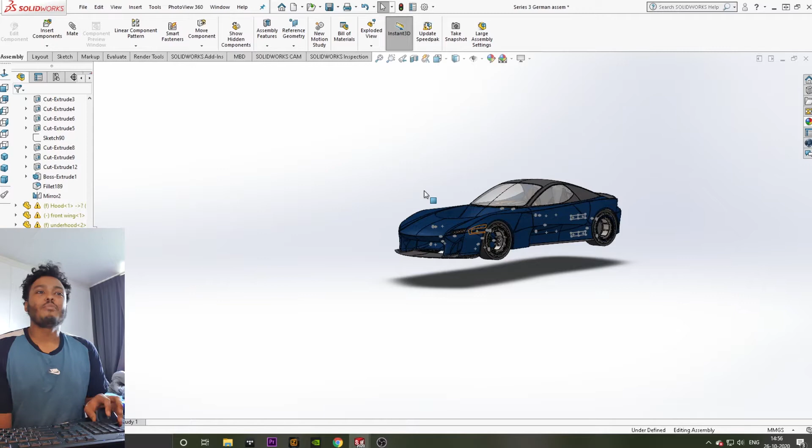I've been working on this car for about the past 3 to 4 months, I would say, and everything is completely done now, so I don't really have to add anything to it.

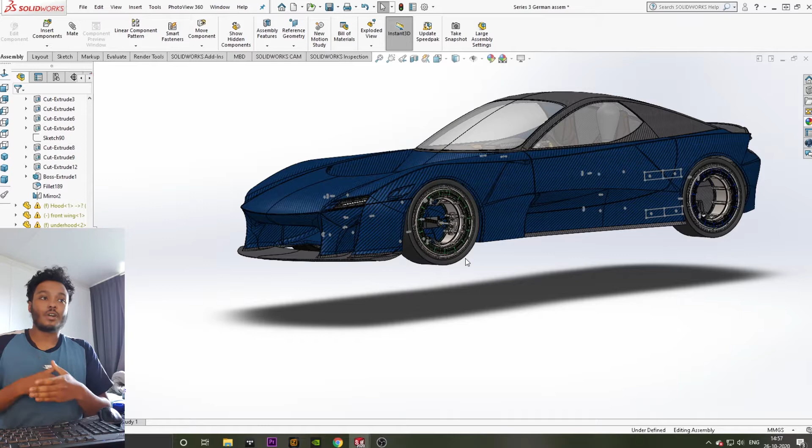So this car will take advantage of hydrogen fuel cell technology that would enable the car to have a very limited tank that you could put hydrogen in, that would allow the car to have a high energy density and a high range and all of that.

With that, you would also be able to have maybe metal 3D printing, which would be capable of using multiple materials within a metal 3D print, and then it would be possible to integrate a full electric motor system that is 3D printed in one go.

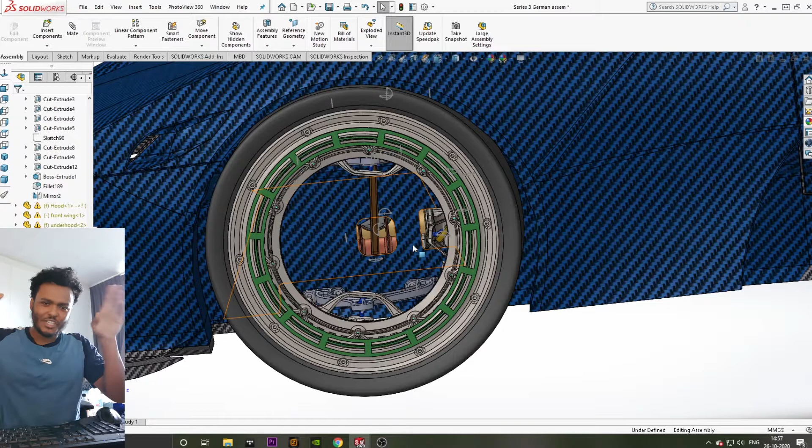I know this is like future gazing and kind of using my imagination a little bit of what would be possible, but I do think that is kind of what the future of powertrains, or even what the capabilities in the future are.

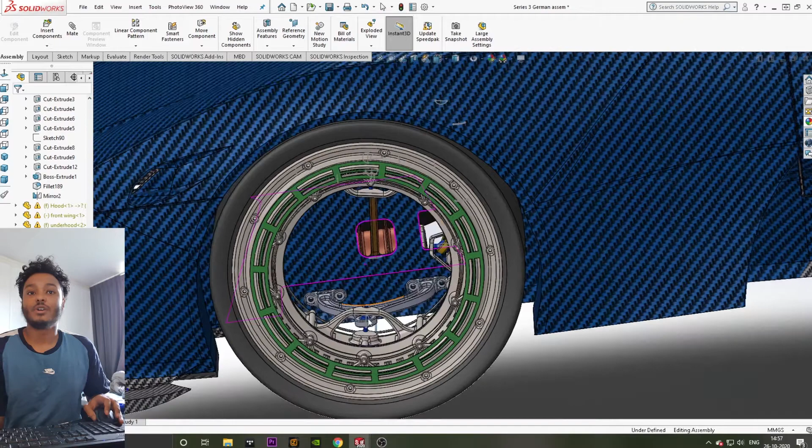So that would make it possible to make a hubless powertrain that would actually be in the wheel assembly. This would be the electric motor itself. You would have the suspension upright, and all of the suspension components would then also be mounted to the wheel, and even the steering rod here.

So you could see, even if you go underneath it, that there is quite a sophisticated suspension setup going on here. If you take a couple of the body panels off, here you have the torsion bar.

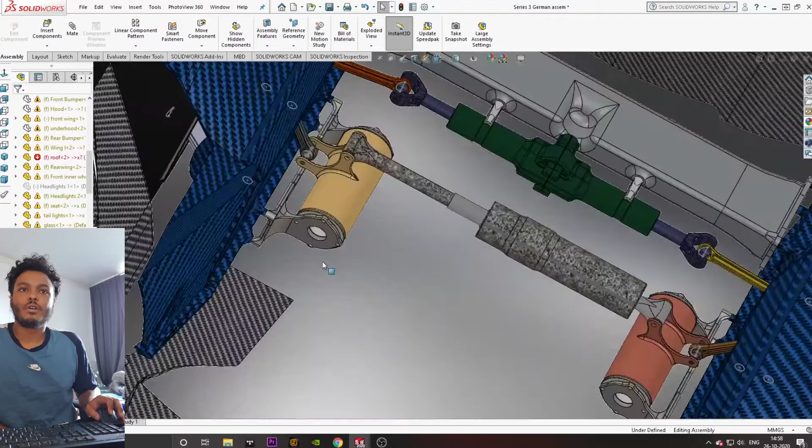The torsion spring suspension setup with a pull bar that is attached to the top wishbone, and then you also have almost like a Koenigsegg triplex anti-roll bar hydraulic bar that's in the middle.

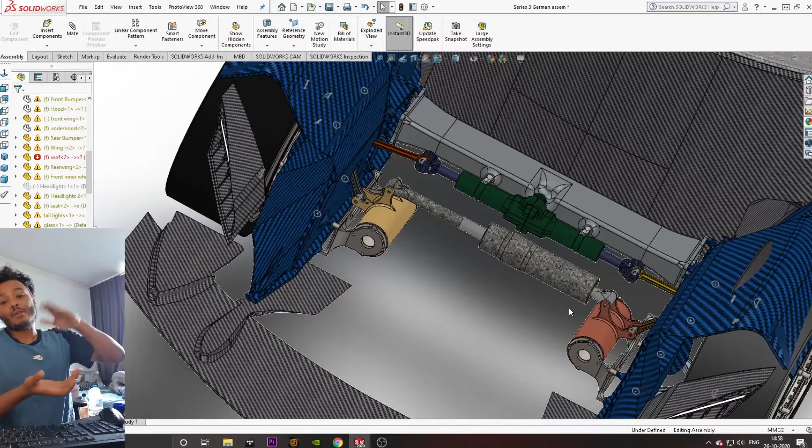That could control the ride height of the car, and also the anti-roll bar stiffness to keep the car level in different ways, and also adjust how stiff you want the suspension setup to be. That is basically what this setup would be here in the middle of it.

As soon as you start to move the wheel up and down, you can see that this right here is a torsion spring, so that will start to rotate, and that is a spring that works on rotation. You would have one point that stays solid and the other one that's rotating around that point, and that will create a spring effect.

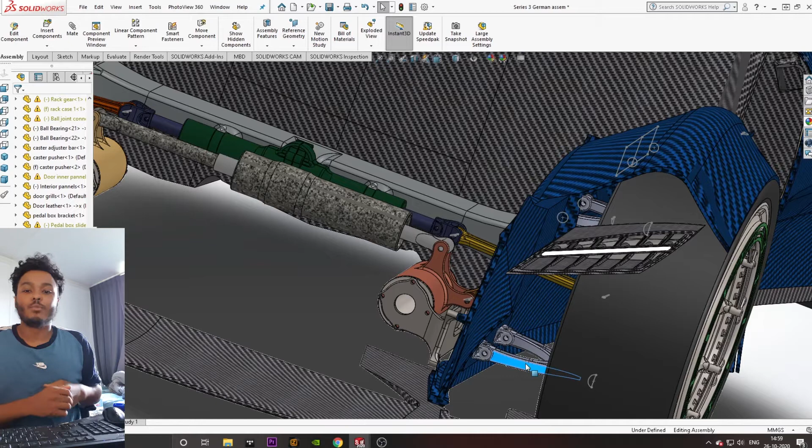That rotation is then transmitted to this center spring here in the middle, so basically if you were going through a corner and this wheel would be pushed up in the air, leaning in, then it would push the other wheel again against the ground to keep optimum traction on both wheels on all corners.

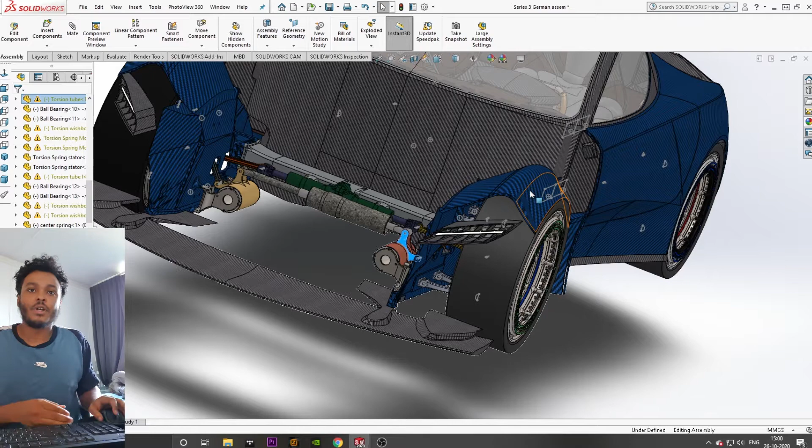So it's kind of like an anti-roll bar damper system that is in the middle there. That is basically what you would be able to do with the packaging and everything.

And then this is the steering rod, and it is actually now also on pistons that would make it possible to move it backwards and forwards, so you can kind of create a Mercedes DAS system for Formula One, that you could actually adjust the steering angle.

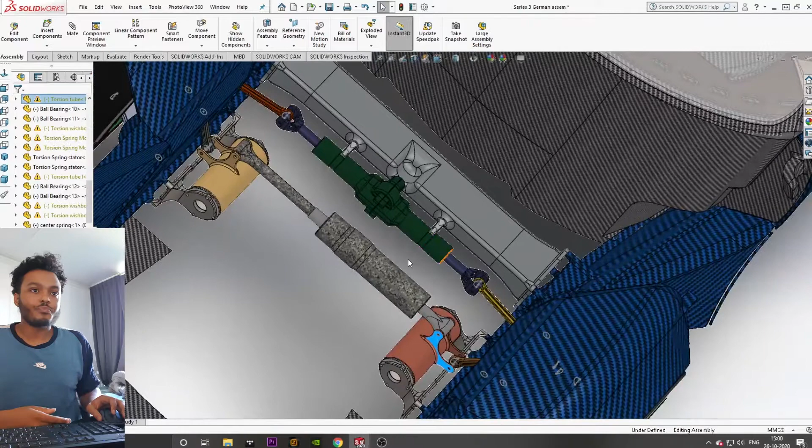But I locked it now in place because I wanted to find that neutral spot where it's supposed to be, and that is the setup that you have here.

So if I then move the steering axle, you can see both wheels are rotating, and that would create steering lock in the car.

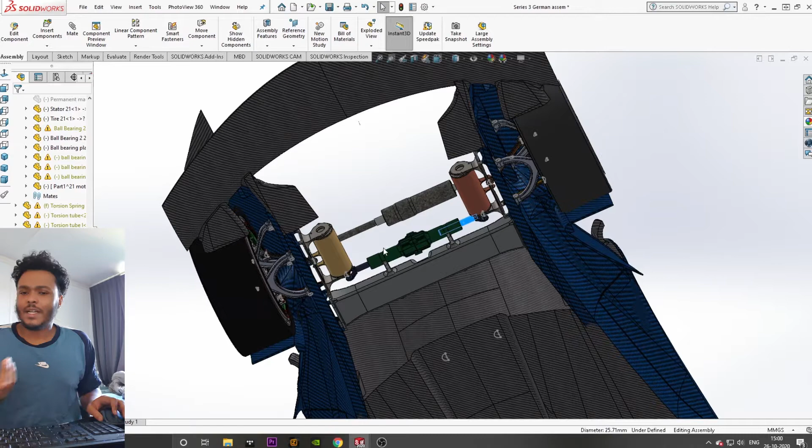I'm about to take this file over to Blender, not in this video, but I still also need to watch tutorials on how to do it. I'm going to make everything so I can rig it, and also put it in the Unreal Engine and drive it around. So I won't be able to do that in this video, but I'm working on getting there.

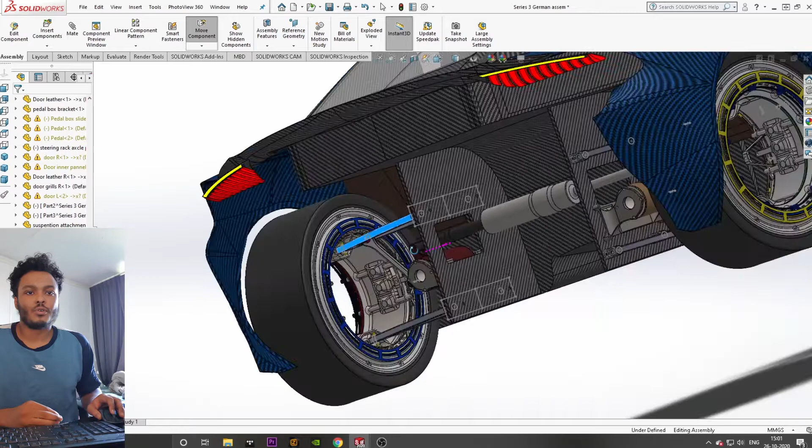And then in the rear is basically the same thing, and you would need one more bar here to make sure these pivot angles keep the wheel in place so it's not able to steer. Or I could even fit the same steering arm to the rear as well, to enable rear axle steering, where you could turn the wheels in opposite directions. That might be a better option.

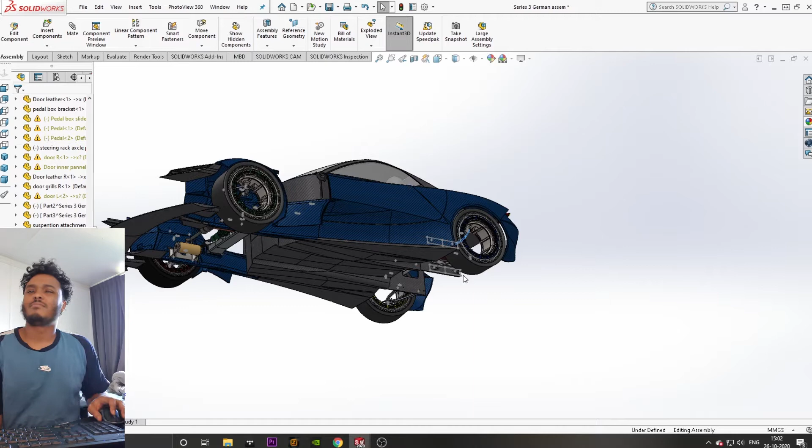I'm gonna do that. I'm not done yet, but I'm almost there. It's not too much of a job, I can just copy paste it and have the same result going. So I need to get that done still.

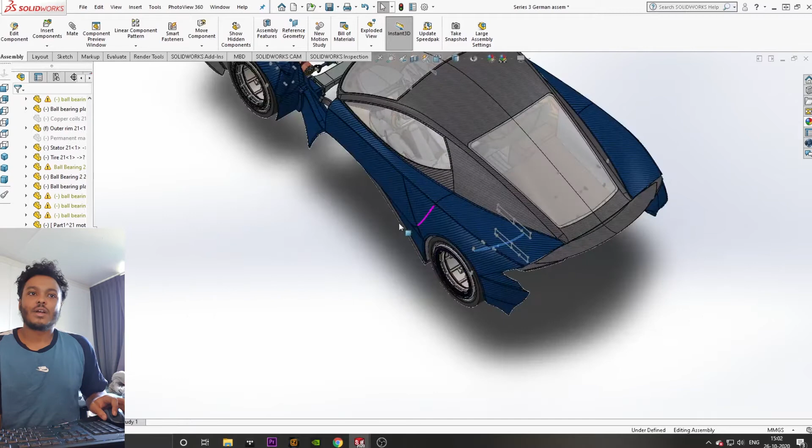But before I get into anything else, let me show you the interior. The doors are kind of like on an Aston Martin swan wing, but it's a little more extreme than the Aston Martin, just a bit more vertical. And that's just this very simple mechanism that's floating in here.

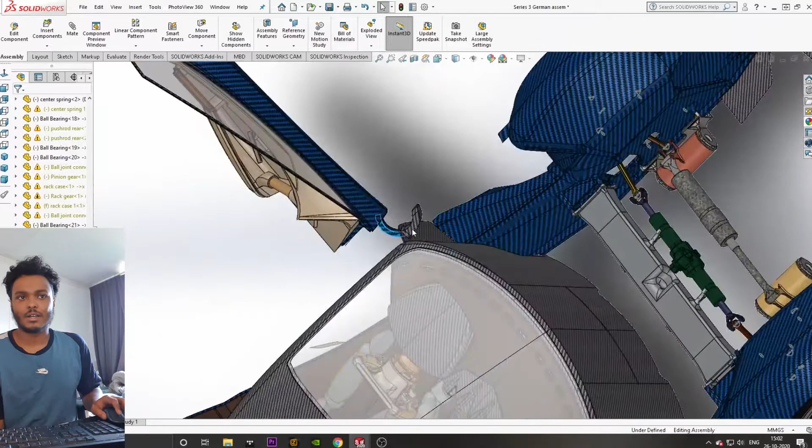Because I'm now making stuff for video game purposes, I just need it to work in the virtual world, not in the real one. So I'm using solutions like these to get things done, just to make it operate and look like a real car.

This is like a screen that needs to be attached to this door panel right here. I should also change the color of all of this. But basically the interior will consist of a door that opens up pretty wide so you can get in. It's kind of like a monocoque setup.

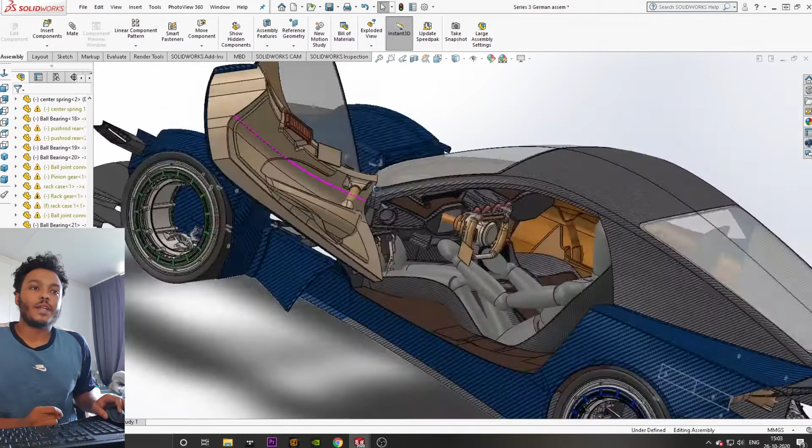You would have your steering wheel here, and you'd be able to adjust its position with these knobs on the center console. You can push and pull the steering wheel towards you and backwards, and also do the same for the pedals down in the footwell. The seat would then stay stationary - you won't be able to move the seat around.

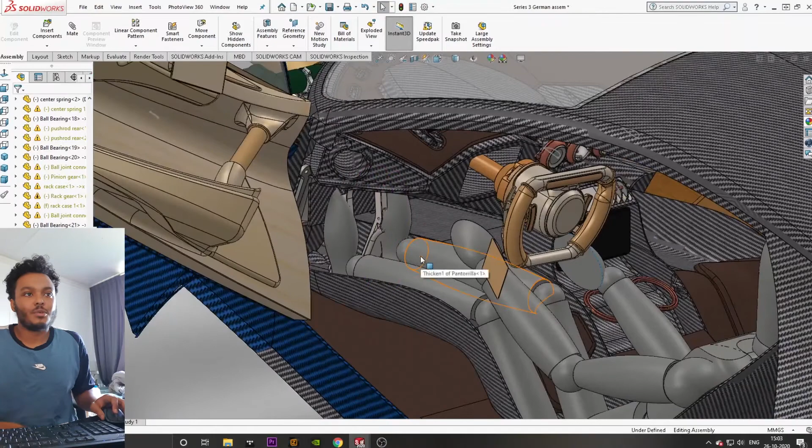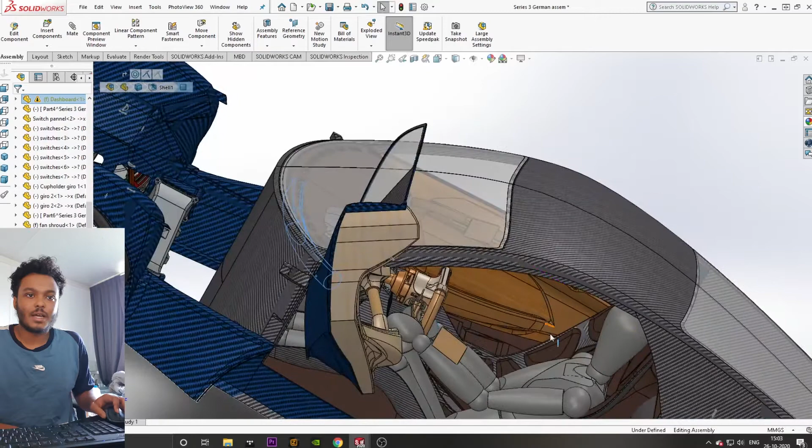You have an air conditioning duct system controlling how the air moves out here for the windows. This channel would lead to the door and exit right there, so you'd have a cooling system set up pointing from the side. The speaker system would also be pumped through that whole system. So I tried to make an interior that would be cool to use and have a great sound setup.

And then basically here underneath the floor, you would have the hydrogen fuel cell that sits here and delivers all the juice to the electric motors integrated within the wheel design.

So what we're about to get into now is basically video game car design. It's very interesting to me because I don't see a lot of people doing this with their indie dev games. I think for video games you can only have a little bit of reference to either real cars or like Grand Theft Auto, where they make up their own brands.

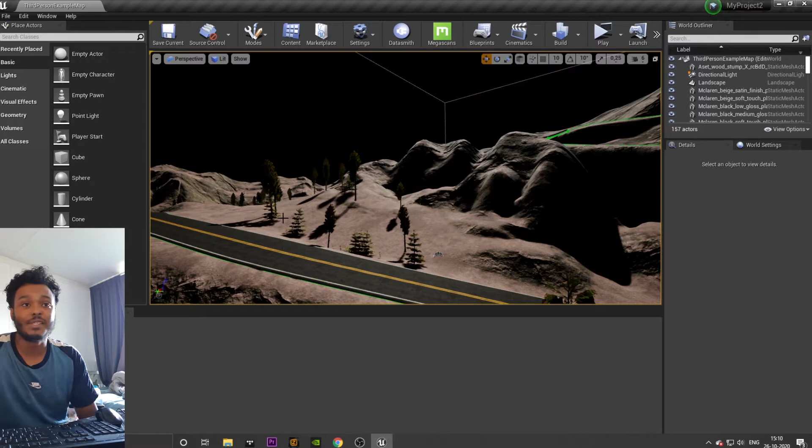With Grand Theft Auto, what they do is mimic and combine different designs from different companies and put them together to get the result the quickest way possible, which is a very smart way to go about it. But with me, I pride myself most on my 3D designing capabilities, and I want to come up with my own stuff and do it that way.

So what I did was I made this car. Basically what you can see here is my attempt at my own video game design, and I'm gonna turn the camera speed down so I can walk through it. Or what I could even do is literally walk through it.

That is also the amazing thing about Unreal, is that I could just walk around my car in this way. That is something I have never been able to do before.

With the design, what I wanted to achieve is that from every single angle this car would look different. The ability that these open wheel designs give me is linking that same open design throughout the whole architecture of the model, because you no longer have a motor in the front of the car.

You no longer have the need for radiators because you don't have an engine in the car. All of those differences and changes in the underpinnings of this car will also allow you to break the rule book of what regular car design looks like.

But you still need to maintain some level of recognizability within car design. That is the challenge I gave myself to solve: I wanted something that looked like a recognizable car for certain angles, but then when you start to pay attention to the details, you start to figure out that this is not a regular car at all.

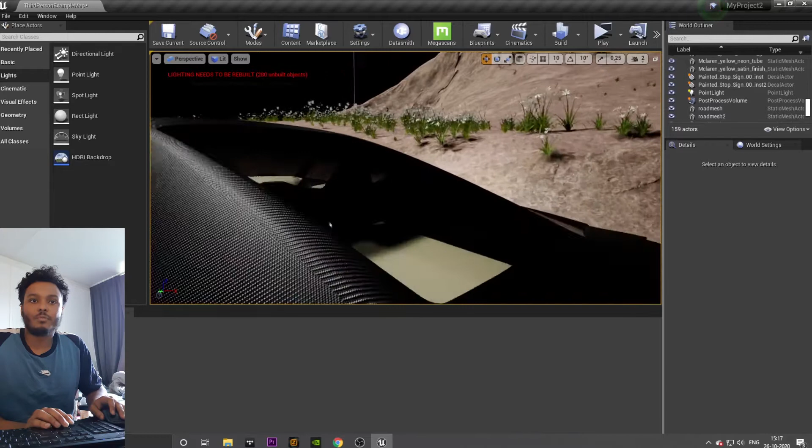Speaking of the interior, I can show you what it would look like once I'm on the inside, and maybe I should also put a bit of light here and here. I can put extremely realistic textures on these seats, using carbon fiber, so the interior display is just way better than SolidWorks could ever be.

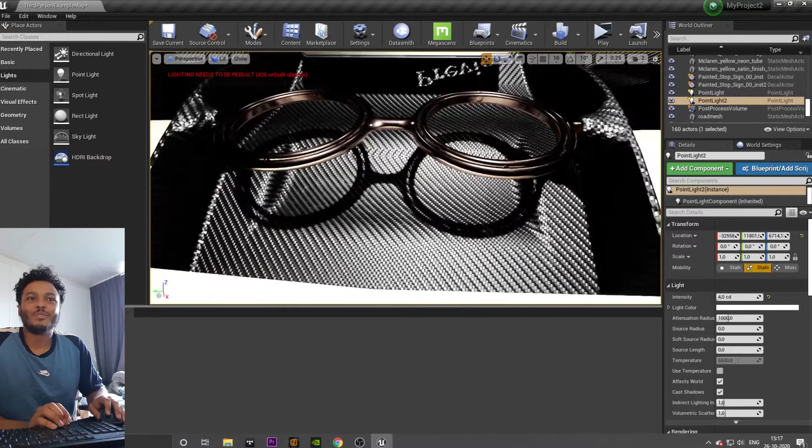You can see even the reflections coming from the cup holders, and these would be gyroscopic cup holders, with pivoting axles right here and also on the center line. So if the car is braking, they would be able to swing with the direction of the G-force.

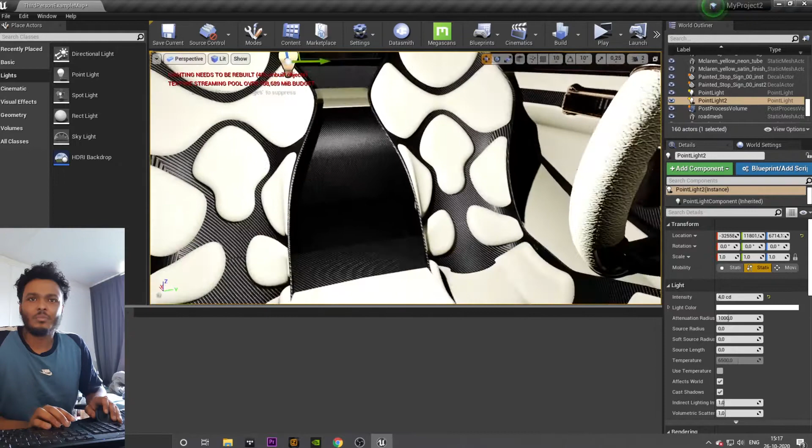But then you'd have these seats that are just carbon fiber shells, a bit like the McLaren Senna way of doing things, and it's just amazing the way the carbon fiber looks. Also as a designer, to see my own work in this way is an extremely satisfying thing to have.

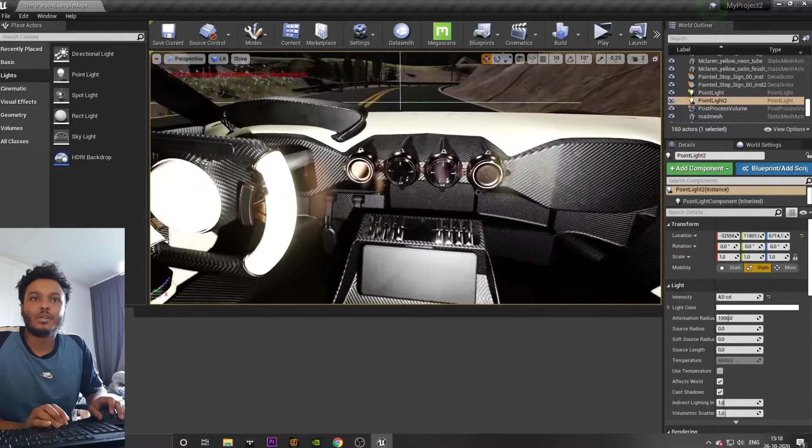So this would be the air conditioning system with the speakers and everything set up, and you'd have these screens right here that actually showcase what the camera films, as a reversing camera. I'm also putting one more dot on the back of the bumper to showcase the rear view camera on this screen.

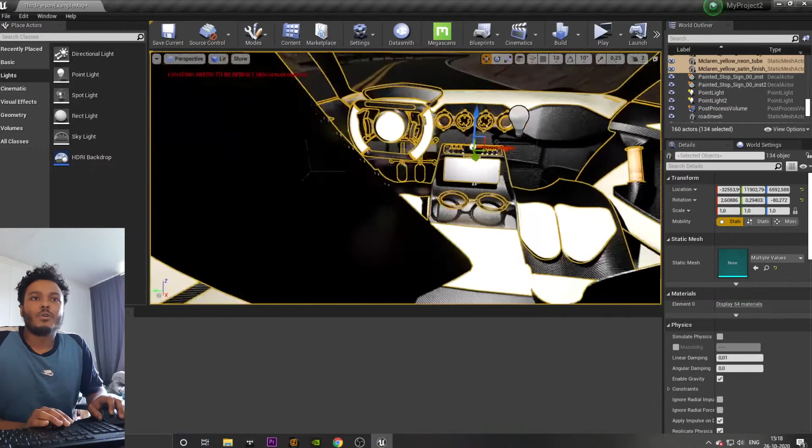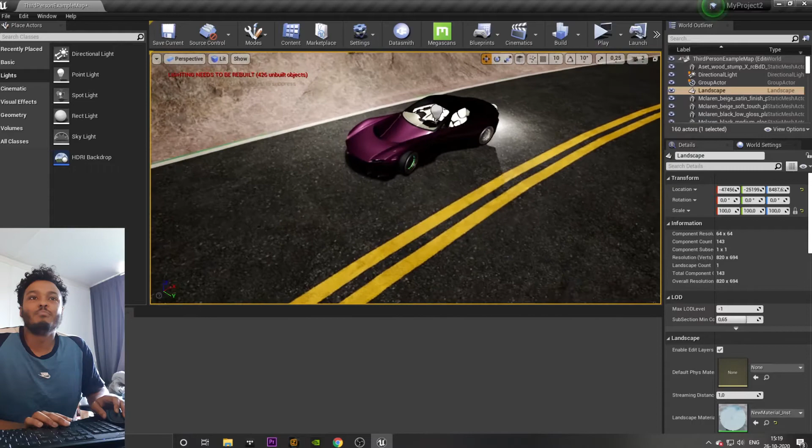So you'd just have an overall dope design, if you ask me. Of course I'm gonna be a little biased, but to have in a video game this level of detail that I'm trying to get in there - I don't think a lot of indie games tend to look like this. I don't know if I'm cocky saying that, correct me if I'm wrong, but from most single person development games I've seen, I think I'm making quite good steps in this process right now.

So, one final thing I'm gonna touch on and then leave it alone - right here you can see the lights in the wheels are actually shining, and these are now on color changing palettes.

What I want to do is have the light showcase the amount of power going through the wheel, because I want to make a torque vectoring system where you could actually drive it like a tank - powering the outside wheels and turning them in the forward direction, but powering the inside wheels and turning them in the opposite direction. So stuff like that could be done as well.

I was thinking to showcase the amount of power through a light source in the wheel that's being put through every wheel. And also if you turn to the left, you'd have an indicator system or something like that. So that's something I want to add to the game as well.

But this is getting fun now. So I'm gonna get the car driving as fast as I possibly can, and then start rolling out a bit more of the details of the game, and start figuring out the way to launch it - whether I'm going crowdfunding, or different ways you can maybe get involved in the release of this game.